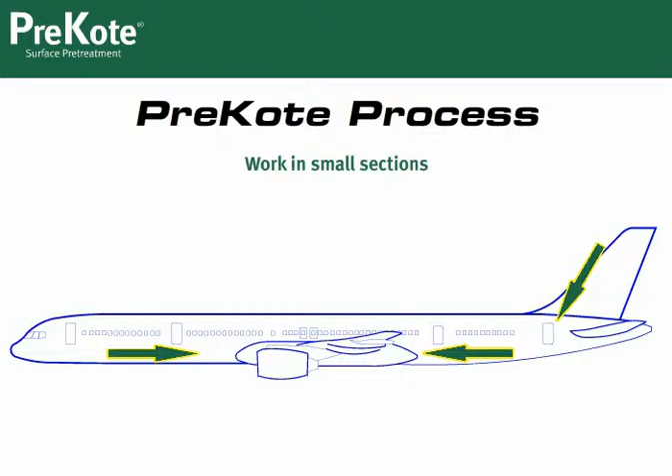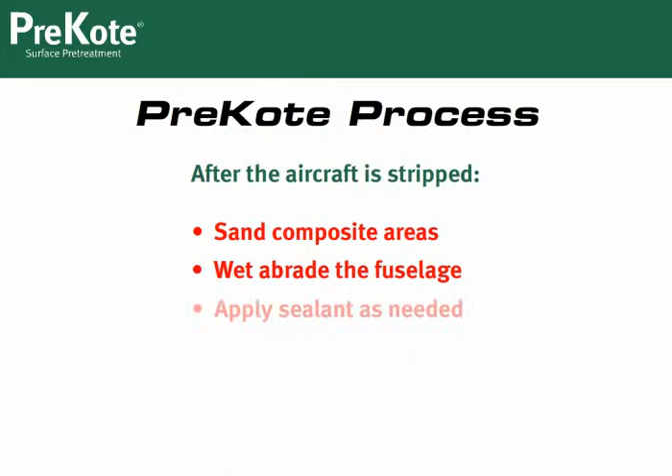Before you start the PreKote process, first make sure the aircraft is prepped. After the aircraft has been stripped, sand composite areas, wet abrade the fuselage, apply sealant as needed, and mask areas that will not be painted.

Alright, now we're ready to apply PreKote. Step 1. Spray PreKote in the small section. Using the pole scrubbers with a Scotch-Brite, scrub the PreKote into a rich foam using vertical or up and down motions. Be sure to overlap strokes so you cover all the surface. Pay close attention to leading edges and high erosion areas. Do not rinse the PreKote or allow the PreKote foam to dry. If it does, reapply the PreKote and scrub again.

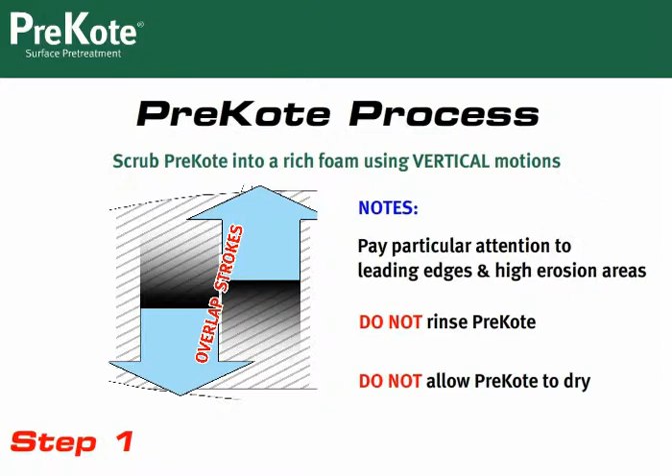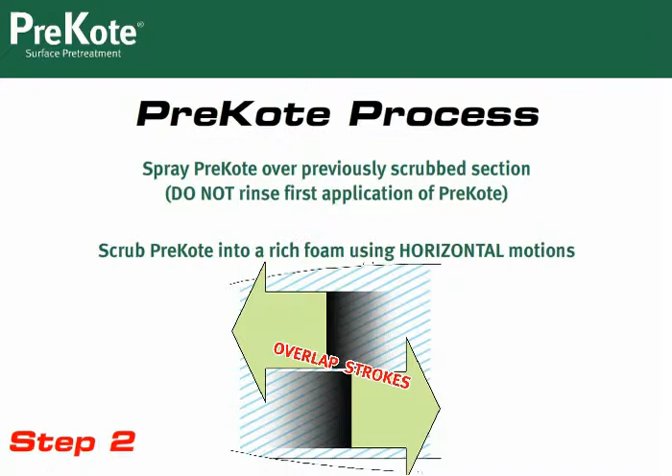Next, spray another coat of PreKote over the foamed area you just scrubbed. This time, scrub the PreKote in a horizontal or left to right motion. Again, be sure to overlap strokes. Pay close attention to leading edges in high erosion areas.

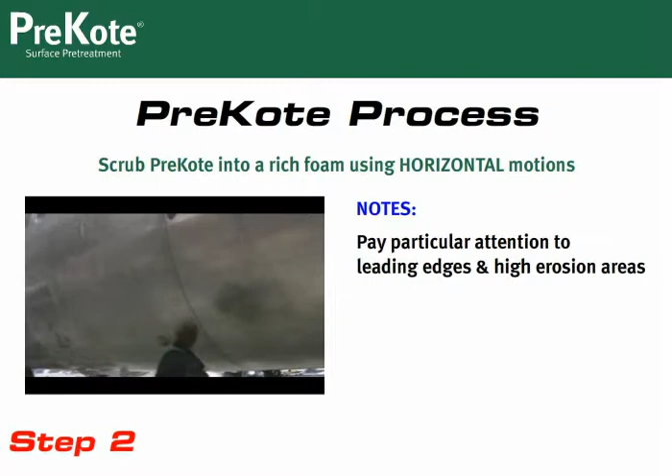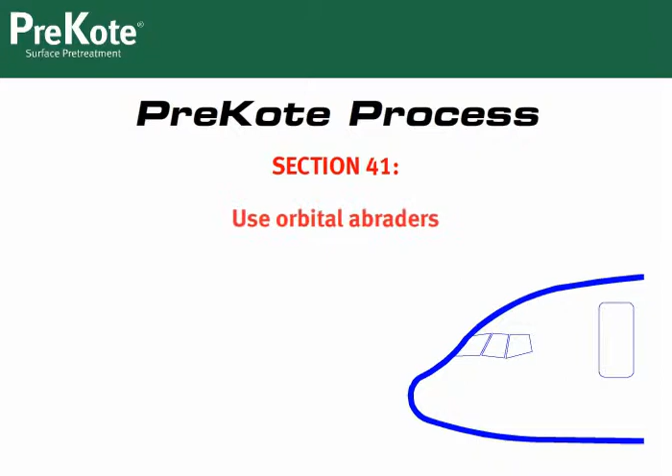Please note, when pre-treating section 41, use orbital abraders instead of pole scrubbers. This will ensure even greater adhesion in this high erosion area. For the second application of PreKote on area 41, pole scrubbers may be used. Now that you have applied and scrubbed twice, you're ready to rinse the section. Always rinse from the top down.

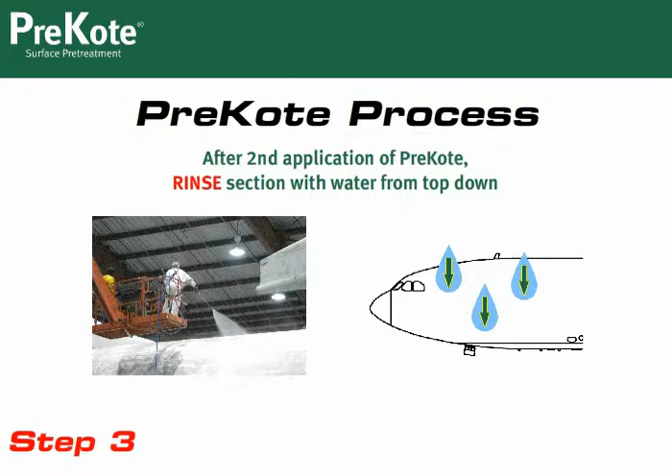Now move to the next small section and continue this process for each section. When all the sections have been processed, remove all the masking. Inspect the aircraft. Rinse any areas where PreKote foam remains, ensuring the entire aircraft is clean. Once the aircraft is dry, you're ready to prime. Be sure to prime within 24 hours. This is to ensure the skin does not become contaminated with materials such as dust and dirt.

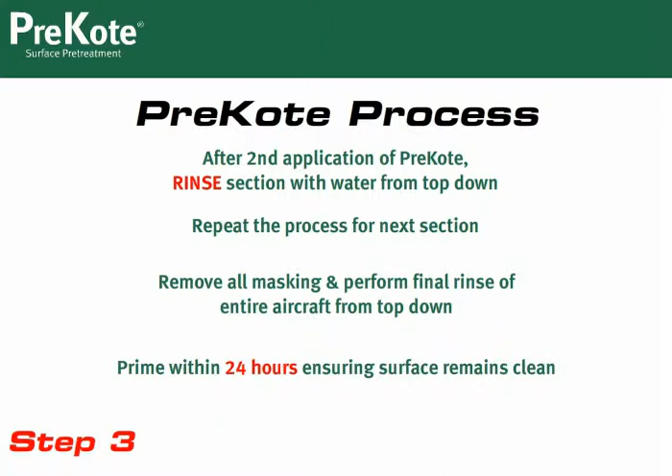Some things to keep in mind. The type of abrasive pad is important. Only use the recommended type. Do not allow PreKote to dry during either application. Do not rinse the PreKote between applications. Remember, you apply and scrub twice before rinsing the section.

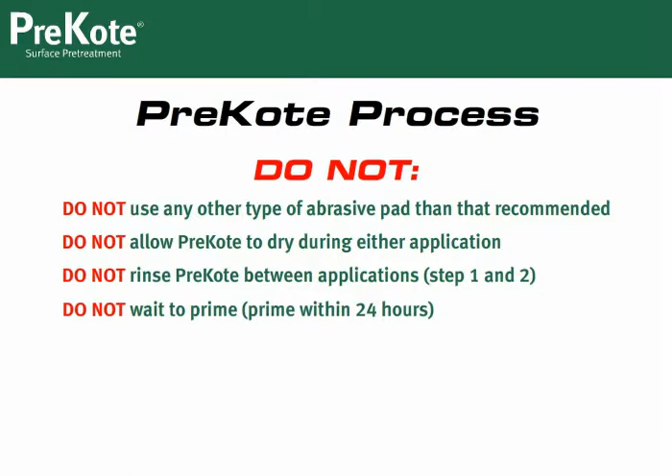Do not wait to prime the aircraft. You don't want the aircraft to become contaminated prior to priming. Do not solvent wipe the aircraft after the PreKote application. If for any reason by accident these things do occur, simply start over.